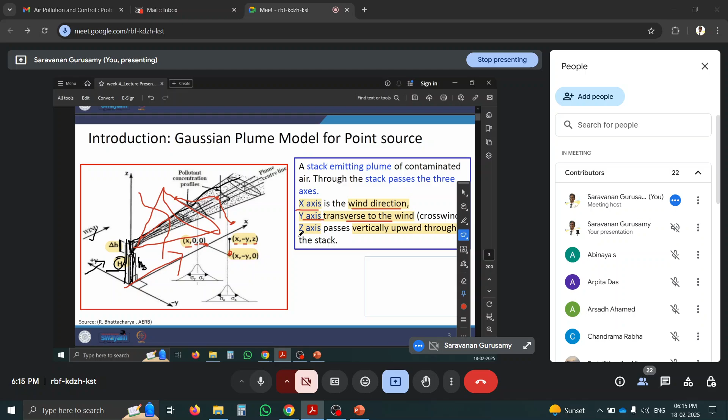Plume is the air parcel emitting from the industry. Based on different buoyancy conditions, it may rise more or less. Also, temperature and exit velocity determine this, as well as wind direction. These are the parameters affecting the concentration of air pollutant. First is the wind direction: the initial direction of transport of pollutant determines the wind direction, where it's turning, and it is inversely proportional to increase in the wind angle direction.

Next is wind speed. A higher wind speed gives more dispersion; if it is a slow wind, you will not get dispersion and the pollutant may get concentrated. Also, wind speed increases with height. If you have studied fluids, you know the wind speed at the bottom is lower, and if you measure going up with height, the velocity will be more, because air is also a fluid and flows in the same pattern. So wind speed generally increases with height, and buoyancy versus plume rise is affected by wind speed. If the wind is 6 meters per second, pollution dispersion is more; if it is only 2 meters per second, pollution dispersion is less.

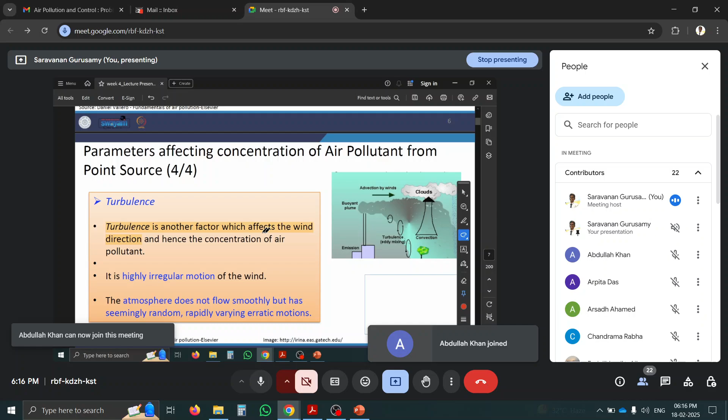Turbulence is caused due to obstacles like irregular motion, buildings, trees, or clouds. If they come in the wind direction, the wind will form eddies, which is a circular motion. That is the turbulence of the wind. Turbulence is another factor which affects wind direction, and it is highly irregular in motion.

For the Gaussian plume model, we need wind direction, wind speed, and the turbulence caused by the wind. These three factors need to be considered. Wind speed and wind direction you can measure, and based on the turbulence you can give the stability class like A, B, C, D, E, which we discussed last week.

To derive the Gaussian plume model, what assumptions can we take? The plume should spread due to molecular diffusion. That is the main transport mechanism by which the plume is spreading or dispersing.

The time required for the pollutant to travel to the receptor is neglected. That's why it's called steady state, because the concentration of the pollutant with respect to time will be zero. It is not changing with time. That is called a steady state concentration.

It will always follow a normal distribution. That is a very important point. In any direction you take, it will be a normal distribution, as you studied in mathematics. It is like a bell-shaped curve.

At the center it will be maximum, and at both sides it will be skewed down. For example, if at the center it is 10 milligram per meter cube, here it will be 5, here 2, here 1. So it reduces in both directions. That is called a normal distribution.

As I mentioned, this is the wind direction. This is the transverse direction of Z, and this is the transverse direction of Y. So it's following the normal distribution pattern.

You have to understand the symbols. Concentration is C, measured in gram per meter cube or microgram per meter cube — in one meter cube of air, how much pollutant is there. Anything — PM, ozone, volatile organic compound, NO2, CO2, SO2 — any concentration is C, mentioned in units of gram per meter cube.

Somebody is trying to share their screen mistakenly.

Emission rate is Q, in gram per second, from the chimney. For example, per second, 10 milligrams of CO2 is emitted, or 100 milligrams of CO2 is emitted — that is the emission rate.

Wind speed is U, and the standard deviation in the horizontal direction of the plume is sigma Y, because it's a normal distribution. So in the horizontal direction it will be sigma Y, and in the vertical direction it will be sigma Z. These are the two coefficients we have to mention, with units in meters.

The physical stack height is h, and the effective stack height is capital H, which is the addition of h plus the plume rise, delta H. That gives you the effective stack height.

Downwind direction is X, along the wind direction. Crosswind direction is Y, and the vertical direction is Z, which is the receptor height above the ground.

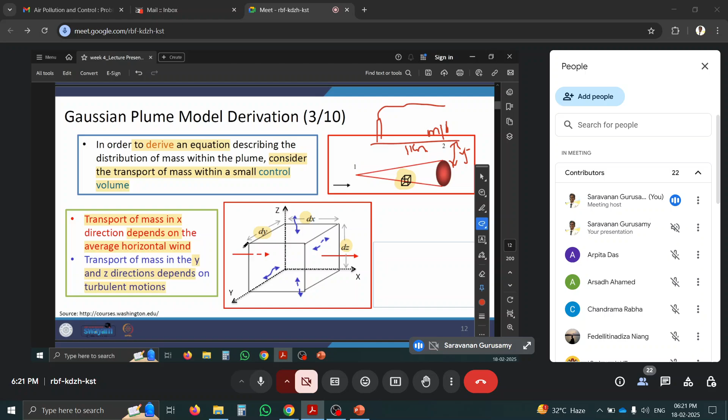Then the Gaussian plume model derivation will assume the transport of mass within a small control volume. So you assume here the pollutant is emitted and here the receptor is there, so it is spreading in a conical pattern. I am taking only a small

cube for modeling the concentration, and then I am integrating all the cubes to get the total concentration. You got it? So every derivation will formulate from a small cube or small piece of it, a control volume, we can say.

Then the transport of mass in the x direction will depend on the average horizontal wind, and the y and z direction depends on the turbulent motion. Because from here, how it will reach in the x direction is based on wind direction and wind speed, and it reaches in the z and y direction because of turbulence in motion.

That's why it's spreading in both y and z direction. It's moving in the x direction due to horizontal wind. Those are the two transport

factors. Then the change in the x direction you can calculate based on the mass balance. Whatever is emitted here will come out here also. So the net change in the mass flow will be mass in minus mass out, which will be your net change in the mass. That can be calculated based on C, U, A, Y, Z, because if you cross out all the

units, you will get microgram per second. That's your mass flow rate.

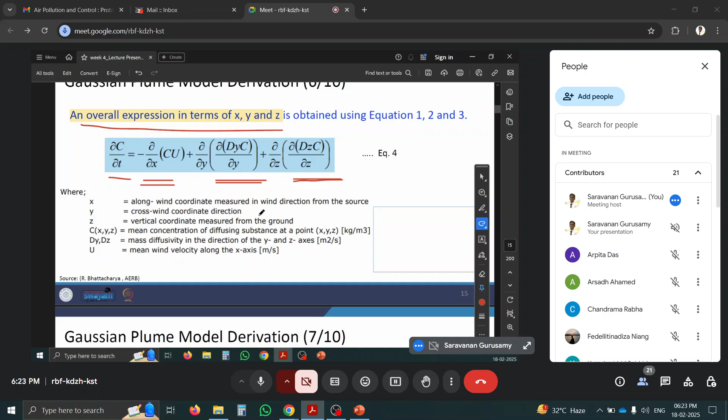A differential equation. So as we studied in mathematics, any differential equation can be derived by what we call an ordinary differential equation, which can be

converted into a general equation with the characteristic equation and a particular integral. Like that, if you assume the boundary condition of del C by del T equal to 0, because we know the assumption is steady state, concentration will not change with time. So del C by del T will be 0.

So if you fix this into the equation, you will get the final equation like this. And then you have to convert this into a general solution for the second order partial differential equation. You will get this equation. Then

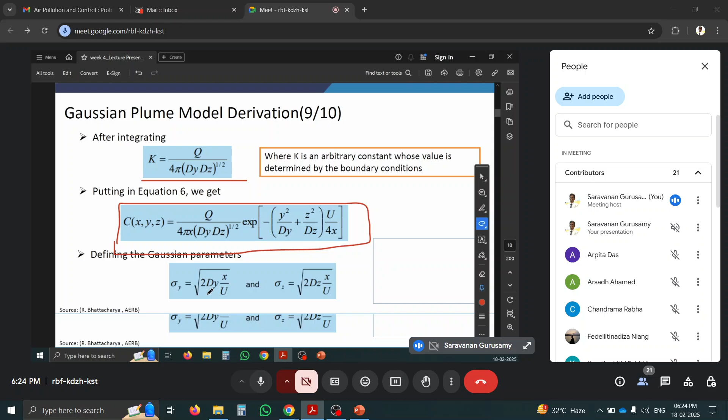you have to integrate to get the k value. That k value, if you substitute back, you will get this equation. This is your final equation, and you have to define the parameters sigma y, sigma z, because whatever the

Dy, Dz and all confusing, so whatever small parameters there are, I am merging them and finding sigma y and sigma z as a coefficient. So the final equation will be this, a general equation to calculate the steady state concentration of air contaminants. This is the final equation of the Gaussian plume model. Whenever you want concentration at any XYZ point, you have to take the emission rate, the flow rate, and

the wind speed, sigma y, sigma z based on x, and why is there no x in this equation? Because x can be used to calculate sigma y and sigma z from the tables and the graphs, okay?

And then you know the y, you know the h, effective stack height, and z, sigma y, sigma z, you can just substitute and get the concentration of pollutant at any point away from the source in the wind direction. So if you want the ground level concentration, substitute z equal to 0, but y is there. Then the equation will become like this, because 1 by 2 will be your 0.5.

Okay, and if you want to measure ground level and on the center line, then y also will become 0, as I mentioned. So the equation will be very much simplified. I will upload a PPT only with the equations.

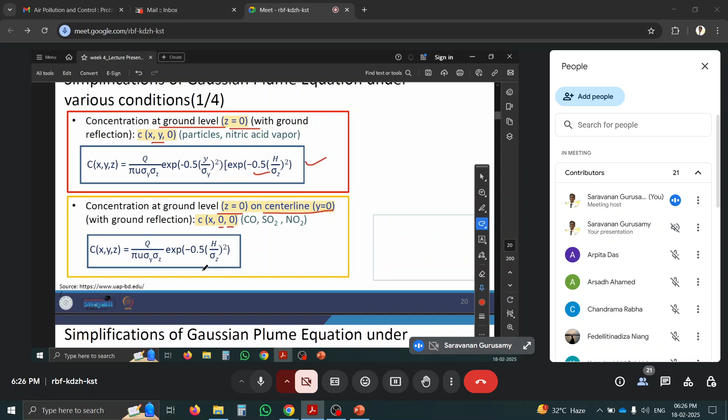So this is a simplified equation. If z equal to 0, y equal to 0, and you want to measure the concentration at the ground level, then with the ground reflection, H also will become 0. Then the equation will be very small. So this is your basic equation. You can substitute it - if y equal to 0, it will become another equation, and if z becomes 0, it will become another equation. So this is your basic equation. Please read this and remain with that.

Another question they will ask - because we know the concentration at any point, but they are asking where the concentration will be maximum. That question will come, right? So to find the maximum concentration, at what distance and what is the concentration. So we need to find the x at which the concentration will be maximum, and what is the maximum concentration. So these two questions will come.

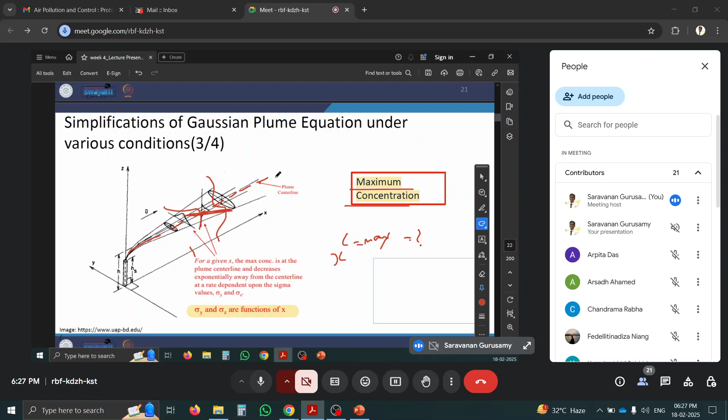For that, I am assuming another condition. The maximum ground level concentration will be at the center line. As I mentioned, it will be a bell shape, and in the y direction also it will be a bell shape. So always it will be at the middle, this dotted line. It will be the more concentrated pollutant. So y should be 0 always, z should be 0 to get the maximum concentration.

Then the equation will be like this, as we have already discussed earlier, and you have to get the stability class from the unknown table - whether it's daytime or nighttime, what is your wind speed, and based on that, your sun radiation, whether it's strong insolation or low cloud cover. So usually it will be D class, because based on the maximum condition, it will be in D class only, the stability class I am saying.

Okay, then the wind speed can be calculated. If the wind speed at 10 meter is given, or the ground level is given, then the wind speed at the chimney's height - chimney, as we mentioned, 250 meter, 300 meter also it may go. We have calculated last week, right? Based on the concentration of CO2 and the concentration of SO2, we have calculated the chimney height.

So if the wind velocity at 10 meter is given, you have to calculate the wind velocity at the chimney height. Wind velocity will increase with height. That's what we have seen in the first slide. So if it is 10 meter per second here, it will be around higher here - always it will be higher than the wind velocity at the bottom.

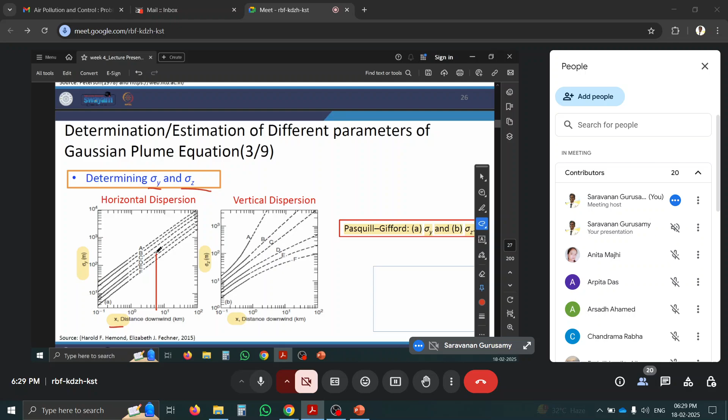Then how to find sigma y and sigma z? So we have the chart for both. We have the x - this is a log, semi-log graph. So if it is 1000 meter, then go with 1000, and you can match with your stability class, then get your sigma y or sigma z. Also, you can calculate sigma y and sigma z based on this type of empirical equation, but that empirical equation requires A, B, C, D type of coefficients - that also you can get from tables.

The theta and all we need from the table. Okay, we will solve some small problem.

The stack in an urban area is emitting 80 grams per second, so Q is 80, given. It has an effective stack height of 100, so directly the effective stack height is given. That is H plus del H, the capital H, given at 100 meters.

The wind speed is 4 meters per second at 10 meters. So they have given wind speed at 10 meters only, and we need to find the wind speed at 100 meters, that is the effective stack height.

They are asking us to find, it's a clear summer day. So what is the stability class for a clear summer day, with the sun nearly overhead, so there is no cloud? And estimate the ground level concentration.

So only x is given, y and z are 0. 2 kilometers downwind of the center line, that is 2000 meters. Center line is y equal to 0, z also 0 because it's ground level.

The second condition is 2 kilometers and 0.1 kilometer away from the center line, so that is 100 meters. So the second condition is this, and we have to find the concentration for it.

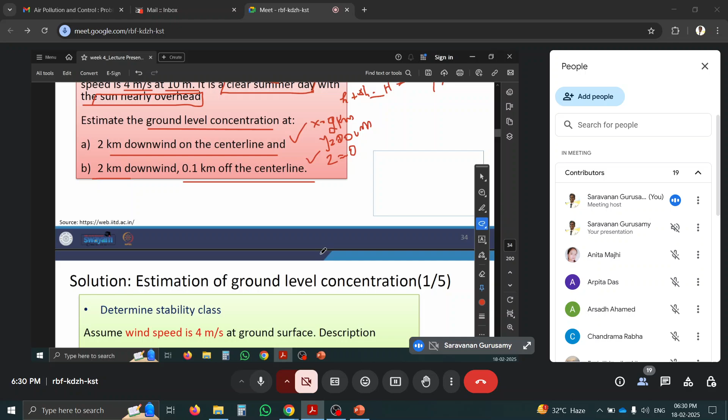As I mentioned, for the stability class, strong insolation because there is no cloud. So at daytime, wind speed is 4 meters per second at 10 meters, then you can identify the stability class as B.

So if you know the stability class and the distance x, then easily find sigma y and sigma z. Then you need to understand the wind speed at the effective stack height, that is 100 meters. So if I know at 10 meters it's 4 meters per second, what is it for 100 meters with p 0.15, because for stability class B urban region it is 0.15.

So if I substitute, I will get the wind speed at 100 meter stack height. Then I have to substitute into the bigger equation. Directly they have taken the x, y, z equal to 0 formula. So if you put it in the bigger formula, z will become 0 and you will get concentration as 64.3 micrograms per meter cube.

They have substituted sigma y, sigma z calculated from the graph, and effective height is 100 meters, y is 0 because y and z are 0, Q is 80 gram per second, pi is there, sigma y and sigma z are there. So this is the formula.

Okay, so same if you go with 100 meters or 0.1 kilometer away from the center line, then y will be there. Then the concentration becomes 60.6. You think here it's 64, here it's 60.

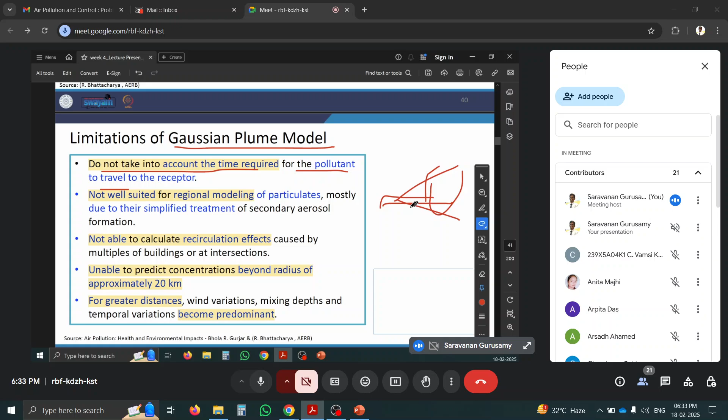But what are the limitations of this Gaussian plume model? It will not take into account the time required for the pollutant to travel, because I am assuming whatever is emitted will spread in this conical form, but I don't know if after 1 day or 2 days it will reach the 2 kilometer mark, or on the same day it will reach 2 kilometers. That is not considered in the model, and it is not well suited for regional modeling.

So it can be used only for point sources and is not able to calculate recirculation effects. We are assuming it's going in one direction, not recirculating because of buildings or intersections. It is also unable to predict concentration beyond a radius of 20 kilometers. So the maximum distance we can calculate is up to 20 kilometers only, for x, y, and z everything.

For greater distance, this will not work out. So that's our conclusion. The Gaussian plume model is very simple, and it incorporates wind direction, wind speed, and turbulence factors. It assumes steady state, and to determine parameters like sigma y and sigma z, we use Pasquill-Gifford stability classifications to get the stability class, which is widely used to estimate the local pollutant level.

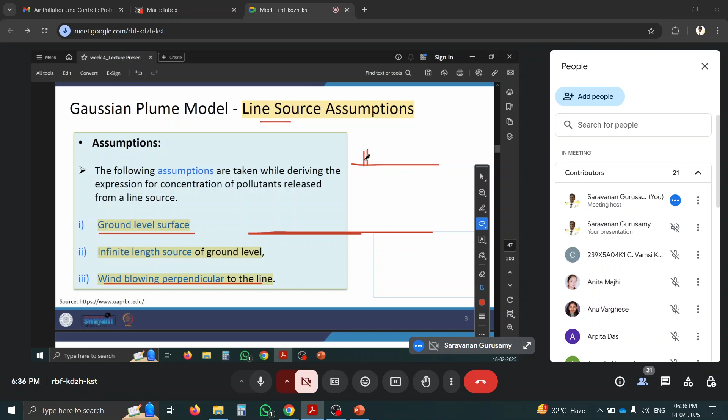So for the line source, we are assuming the ground level is flat, and we have an infinite length source. One different assumption here is the wind is blowing perpendicular to the line. But in the point source, the pollution goes in the wind direction. Here the car is moving in one direction, emitting pollution, but the wind is blowing in a different direction. You got it? That's what the model for the line source models.

So consider a road or a highway. X is the direction of the wind, and Y is your pollution emission direction.

If you want to derive this from the point source, I'm taking the same model for ground level concentration, because it's not emitted above 10 meters or 100 meters—it's emitted at ground level, since all the exhaust from a car or engine comes out at ground level. So we take C(x, 0, 0). That's the formula I'm using here, with z equal to 0, and y taking a value. So this expression for the point source will be modified into the expression for the line source.

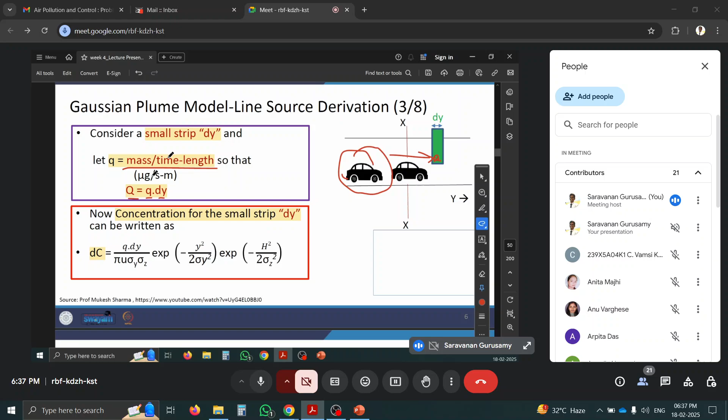As I mentioned, any model can be derived from a small strip or a small control volume. Here I'm taking a small strip because it's a line. So the mass per time per length of pollution is taken as Q equal to small q into dy, which is the pollutant emitted by one car or one particular point in this strip. That can be calculated from this equation, which is then applied to the concentration of the pollutant formula and integrated to get the final equation.

As I mentioned, the line extends to infinite distance, so it starts from minus infinity to plus infinity—there's no boundary. So it is integrated from minus infinity to plus infinity to get the final equation. The simplified equation is this one, for the line source model, and you have to substitute s equal to 1 by root 2 times y by sigma y.

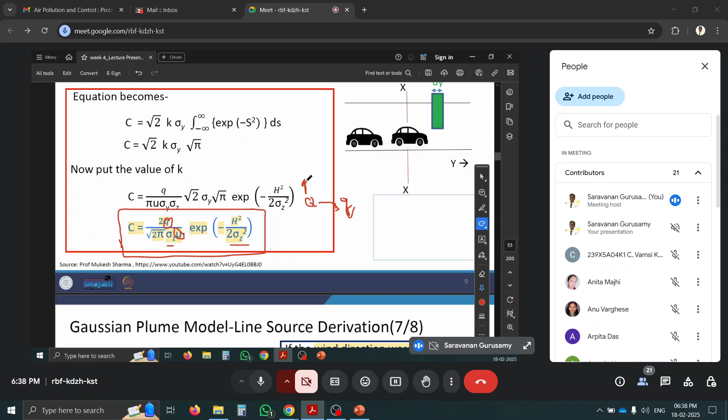So you will get s as a parameter here, and the final equation will not have other parameters. So it becomes C equal to 2Q by root of 2 pi sigma z into U, where U is your wind velocity, and only sigma z will be there, no sigma y, because there's no movement from the center line. And q, the small q, is your emission per length of pollutant—that's why we change capital Q into small q. So small q will be in micrograms per second per meter, or per vehicle.

So this is your final small q per meter formula. If you assume the wind is flowing at an angle, you have to substitute sine phi, where phi is the angle of wind direction. If phi is 0, the concentration will become infinity, so you always have to assume phi is greater than 20 degrees. Otherwise, if phi becomes 0, the concentration will become infinity.

So this line model will be used to find the ground level concentration of any car or scooter emitting ground level pollutant, that is h equal to 0. Then your equation will become this.

So line source examples are motor vehicles, agricultural burning, everything happening at ground level but as a line source. A line of industries on the bank of a river, each emitting in the same direction, is also a line source.

So for your understanding, here is a small problem. Estimate the total hydrocarbon concentration, that is your pollutant, at a point 300 meter downwind, that is your x, on an express highway at 5:30 p.m., that is evening, and an overcast day. On an overcast day, the stability class will be D.

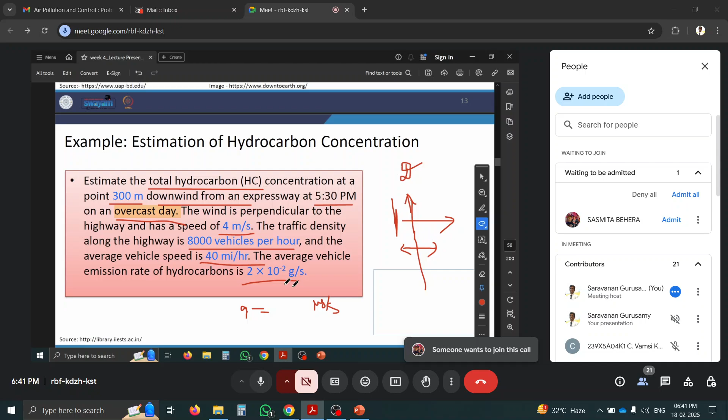I want Q in microgram per second, but this is capital Q. I need Q in terms of per meter, so microgram per second per meter. For that, I have to divide it by meter. Meter will be here, miles is here, so vehicle per hour into mile per hour, hour will cancel giving vehicle per mile. Then you multiply here and you will get per mile. That's the concept here.

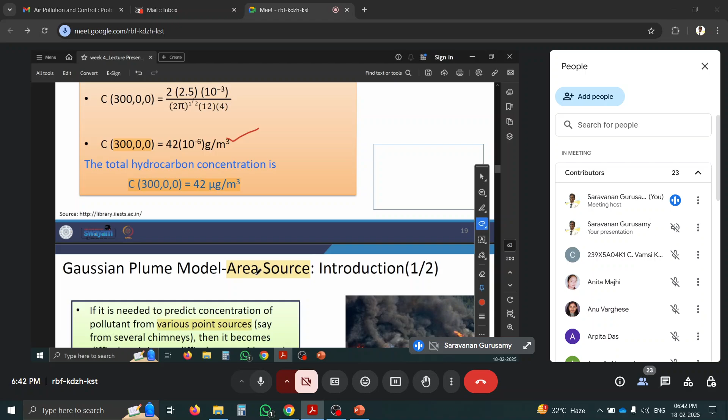Then I have to get the stability class. Stability class is overcast day, that is D stability class. So downwind direction x equal to 300. At x equal to 300 with D stability, what is sigma y, what is sigma z? For a line source, there is no sigma y, only sigma z is required. Substituting this into the equation, you will get a value of 42 microgram per meter cube. That is your final concentration of hydrocarbon emitted on the express highway after 300 meters.

Then the area source. Area source is like burning the whole landfill or a group of industries, or again agricultural burning. All of these come under area source.

So this concept of area source becomes important to facilitate the modeling and predict the concentration, the same way we do for all the models. I assume here there is an area, this is the area source, but I am converting this area source into a point source and using the first formula again, that is the point source formula. So how to convert the area into a point? I have to project backwards, then I will get the point here.

So if I am emitting from a point source, then I can easily get a value at a distance here. So if I am emitting from an area source, I am converting it into a point source. Then after the area source, what is the distance here? I get the total distance and calculate the concentration at this point. So this is one method to convert area source into point source, using the total distance I am getting.

At 300 meters away from downwind direction, this is x as I know it. But I have to get the imaginary x, that is x naught. I have to add this imaginary x and my original x to get the total x. Then I have to do the point source calculation, the same concentration C formula.

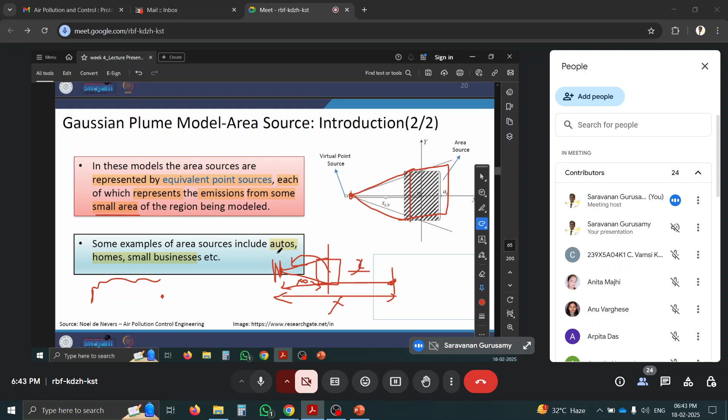Understand the assumptions represented by equivalent point source, each of which represents the emission from a small area. Then it will be calculated as a point source model simply. So the distance of the virtual point - the area is converted into a point here.

That is the virtual point x naught. Then the distance between the location where we are measuring the concentration of the area source and the receptor is xr. Then the total will be your x. You have to use the model for this x only. The final model will be for this x.

And the emission from this point area source is q, and this side is s. Area side is s, I am assuming this is a square, so this will be s. So s is used to calculate the x naught, the virtual point I can calculate.

Then initial spread of virtual point is sigma y naught. See, this is the point, this is the area source. I am actually requiring the concentration at this point at a distance xr, but I am converting this into a virtual point at the distance of x naught. That's the virtual x direction distance. This is the y naught, virtual y naught, sigma y naught.

Now you see the virtual point is taken somewhere back with respect to the original point, and the shifted distance is x naught. Actually, the point is here, area is - I am shifting this point to here because it's the area. That distance is x naught.

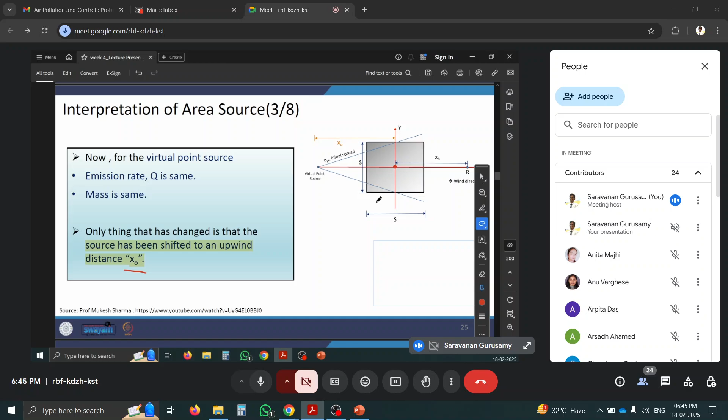How to find sigma y naught? From s by 4.3, that is the exact equation. Sigma y can be calculated from s by 4.3. What is s? S is the side of the area that is emitting the pollutant. If I know sigma y naught, I can calculate x naught, right?

How can I calculate x naught? The same graph I am going back. So I know the stability class, I know sigma y now. So if I go back, I can get the x naught. You got it? It's a back calculation, so I am going backward. I am getting the x naught value.

I know the sigma y naught from the s value. I know the stability class. So if I back calculate, I can get the x naught value. It's simple.

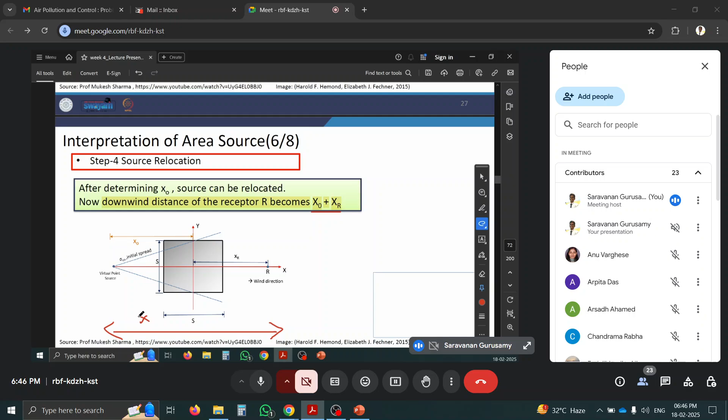Then I have to add this x naught and the xr, the total x I can calculate. So for this x I have to calculate again sigma y, sigma z, that is the final sigma y and sigma z. I have to substitute in my first equation, that is the point source equation, that will become your area value. You got it?

So the summation is your x naught plus xr. Calculate the sigma y and sigma z for the calculated x. Then just convert into normal point source, GPM equation for the point load we have to use. So the only assumption is we are getting a virtual point.

That's it. So let's see the example: upwind of a Taj Mahal. Taj Mahal is here, please don't mind my drawing. So there is a Taj Mahal here, there is an industry 30 meters away, an industry of 30-meter height.

So no need to convert 10 meter to 30 meter; directly they have given wind speed at 30 meter. And the side of the area source S is given as 500 meter. So if S is known, x naught can be calculated from sigma y naught and the stability class. What is the stability class? You can calculate based on stability class.

We can calculate the x naught, and they are asking the distance between these two. If we know this, we can calculate the pollutant reaching the Taj Mahal. So treat the area source as an effective point source.

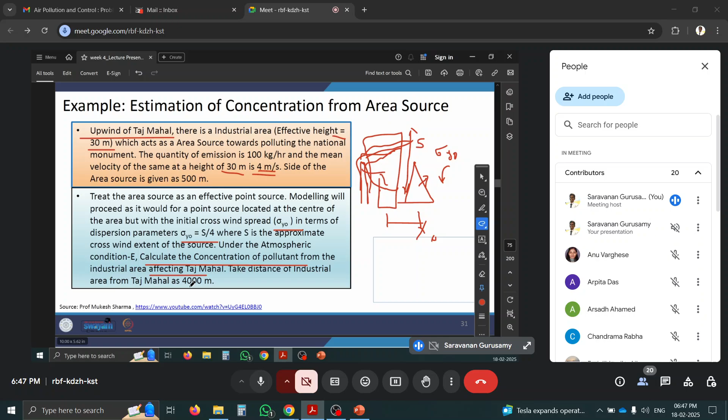Modeling will proceed as if from a point source located at the center. So you have to calculate sigma y naught from S by 4, and calculate the concentration of pollutant from the industry affecting the Taj Mahal. Taking the distance of the industry from the Taj Mahal as 4,000 meters, so XR is 4 kilometers.

So what is X naught? I can calculate it. See, they have drawn this diagram. 4,000 I know, S is 500 I know. This is the wind direction, this is the whole industry, and this is Taj Mahal, T. So I have to calculate S by 4, and I can get the sigma y naught.

The stability class given, the atmospheric condition, is E. So I know sigma y naught and the stability class E, so I can get the x naught value. If I know x naught, just see the figure: X naught plus XR will give you the total. Receptor means R, Taj Mahal means T, so they have simply converted to get the total X.

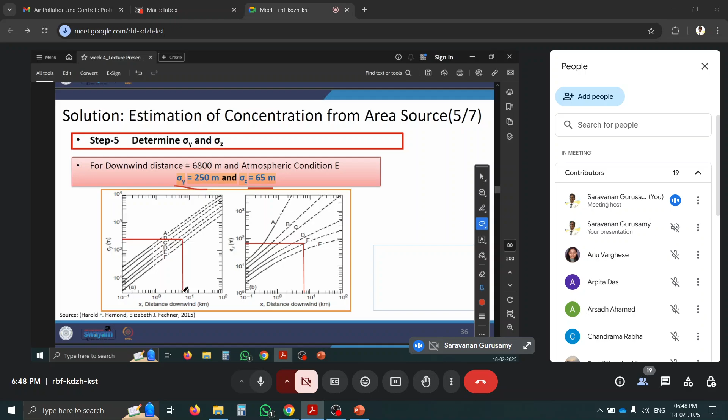So if I know the total X, again I take sigma Y and sigma Z for the calculated X. What is X? 6,800, so 6.8. What is sigma Y? What is sigma Z? Then I calculate the concentration at the downwind direction reaching the Taj Mahal. I know the height of the Taj Mahal and the centerline only, so Y equals 0. Just put it in this equation and you get the concentration as 122 microgram per meter cube.

I hope you can simply calculate this. If you have any doubt, please reach me out.

The initial spread for the intersection of the area source is given as... yeah, that's what we have discussed now, ma'am. Sigma y naught S by, just put the answer.

But please don't discuss the week four assignments here, that I should not discuss here. So the answer, we have actually discussed here: sigma y naught can be calculated by S by 4.2, or S by 4. You got it? Okay, fine.

So what are the disadvantages of this area source model? It requires a large amount of input information because I need the S value, and all the values, so it consumes a large amount of computer time and involves complexity. That's the problem, so I can go with alternative methods like narrow plume hypothesis models or area emission rate models.

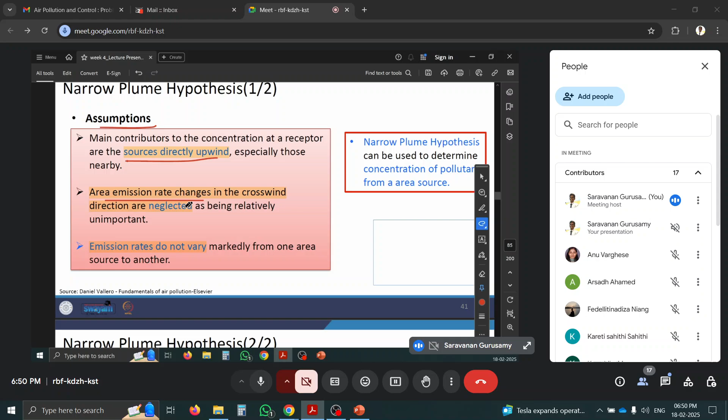The assumptions for the hypothesis are: source directly upwind, and the area emission rates can be neglected in the crosswind direction, and emission rate does not vary. These are all the assumptions, giving the narrow plume hypothesis model, where a series of infinite crosswind lines are calculated. There's the ATDL model, that is the Atmospheric Turbulence and Diffusion Laboratory model, and the RAM model, Regional Air Monitoring model.

C equals K Q A by U. K can be 50, 200 or 600 based on the pollutant like SO2, PM, or CO. QA is the area emission rate, and U is the wind speed. If you know these three values, simply put them in and get the result.

For the area model, you can get the concentration. So the conclusion is: for a point source we get it from the equation, and for an area source you can convert into a virtual point and use the same point source model. But there is a problem with the data - if you don't have more data, you just go with the hypothesis model proposed by the narrow plume hypothesis.

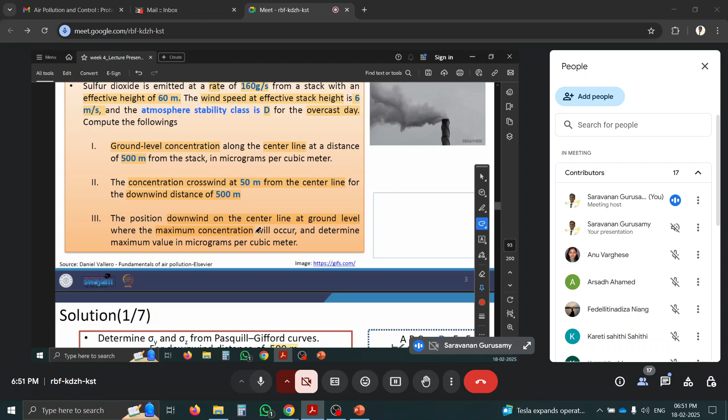Okay, so we will solve some more practice problems for point source, line source, and area source. So read this question, I'm going with the question again. This is again a problem solved.

Sulfur dioxide is the pollutant here. Q is the rate of emission, 160 gram per second, that is emission from a stack height of 60 meters. They directly give the capital H; otherwise you have to calculate the stack height plus plume rise and add both to get the effective height. Wind speed at the effective height is directly given as 6 meter per second, so no need to calculate U at 60 meters again. Atmospheric stability class is capital D - on an overcast day, overcast day means stability class D only.

So they are asking us to calculate the ground level concentration. Ground level concentration is equal to 0 at the center line, so Y equal to 0 at a distance of 500 meters. So X equal to 500 meter. You got it, the first problem. The result unit they require is microgram per meter cube.

The second question asks concentration crosswind at 50 meter from the center line. So Y equal to 50 meter and the downwind distance is 500 meter. The third question asks the position downwind on the center line at ground level where the maximum concentration will occur. So they are asking what is X to get the maximum concentration, and to determine the maximum value. What is the maximum concentration?

C max - both they are asking us to find. So how to find? First I have all the data. For keeping in the bigger equation, I need sigma y, sigma z. To calculate sigma y and sigma z, I know x equal to 500 and stability class D. I can find the sigma y and sigma z.

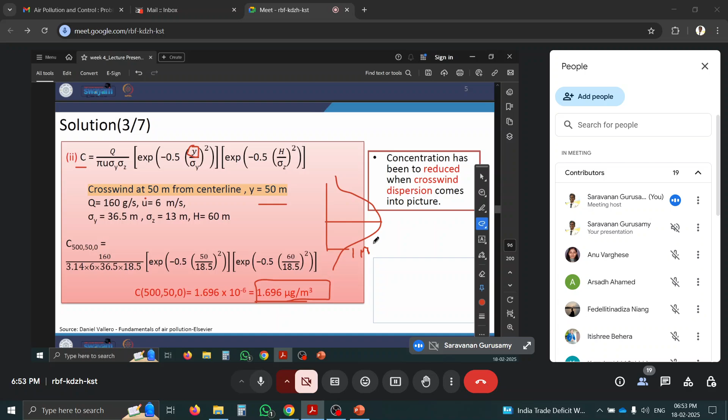Then the second question, y also they given us 50 meter. So substitute y as 50 meter in the same equation, you will get 1.696. See the difference - the concentration is 65 microgram per meter cube, but if you move just 50 meter away from the center line, your concentration is reduced to 1 microgram per meter cube. Think about the normal distribution - it's 60, after 50 meter it is 1 microgram per meter cube. That's what the dispersion happened. It's dispersed a lot, reduced when crosswind dispersion comes into picture.

Third question, they are asking the maximum concentration. The maximum concentration will occur at h by root 2 always. So we know the h value is 60, so we can find the sigma z. From the sigma z, back calculate the x value. I know sigma z, I know it's stability class D, so directly calculate the x value.

That is 1300. So for that 1300, I have to calculate sigma y and sigma z, then substitute in the bigger equation. They are asking at the center line - we know center line only will get the maximum value. So 1300 comma 0 comma 0, 1300 is the first answer - that is the distance at the maximum concentration we can get. And what is the maximum concentration? 873 microgram per meter cube at a distance of 1.3 kilometer.

You got it? Then there is a problem for the point source. We are given sulfur dioxide, same pollutant, at the rate of 160 gram per second into the atmosphere, where the wind speed is expected to be 6 meter per second, same wind speed from the effective stack height, and at the ground level of 10 meter at night time. So they are saying at night time, at the ground level 10 meter height, the wind speed is 5.1 meter per second.

So what is the wind speed at effective stack height? That is 6 meter per second. So you see the difference, 5.1 meter per second and 6 meter per second. And then it is desired that the ground level concentration at the center line is 200 microgram per meter cube. They give at a distance of 800 meters - X also they given. What is the effective stack height?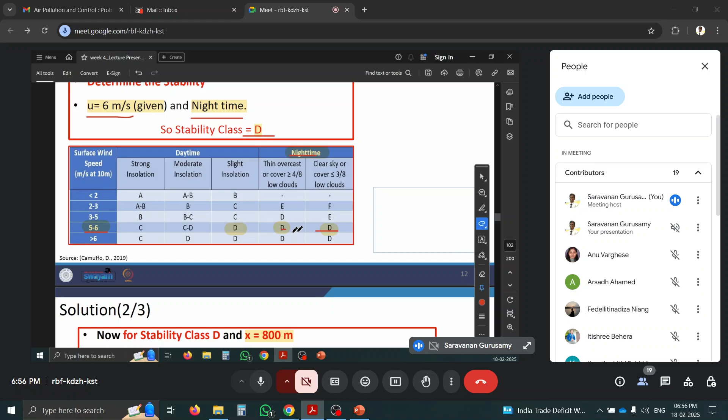H they are asking, so just calculate - use the same formula to calculate H. They said night time, U equal to 6 meter per second, so the stability class will be D. It's calm, wind speed 6 - just see here, night time, so always it will be D-D. From the table they give, you can calculate. Then sigma you can calculate for x equal to 800. Put it in this equation - only H is unknown. You can find H equal to 76 meter.

Again, there is a problem for the point source only. A chimney of height 250 meter, emitting at the rate of 500 gram per second, and it is a sunny day with a moderate wind speed. So you can calculate the stability class. The stack diameter is 5 meter, exit velocity is 13.5 meter, gas temperature is given, wind speed is given, plume rise temperature is given - that is the temperature at the exit. This is the ambient air temperature.

Then the ground level concentration they are asking at the center line at a distance of 1 kilometer. So x equal to 1 kilometer, y equal to 0, and z equal to 0 because ground level. What is the concentration they are asking? Stability class A they given, and the density they are given. So what is the requirement now? We know the x, so we can calculate sigma y and sigma z.

Okay, we don't know the h value. Effective stack height wasn't given, only the stack diameter, because h is missing in that formula. H is required, so for finding that we are going to use the Gaussian dispersion model to find H.

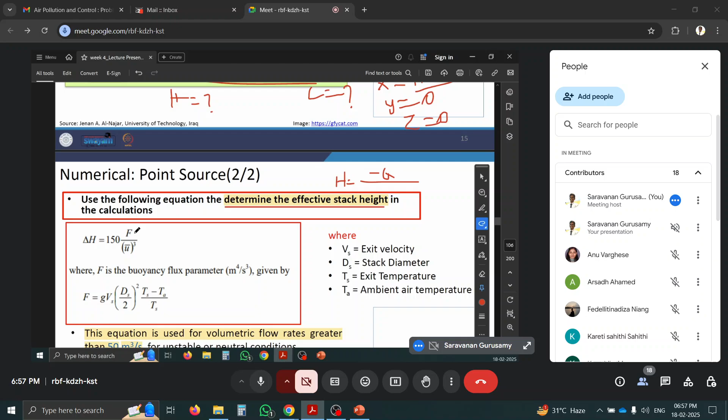You know that value, right? Minus Q by sigma, that also we have. But if you don't have those values, only with the temperatures given, we can use this formula to find the H value.

How to find the H value? 150 F by U bar cube. U bar is the wind velocity at stack height. So F is unknown. Now F can be found. F is the buoyancy flux parameter.

You know the G value, 9.8. You know the exit velocity. You know the diameter of the stack, and then the plume temperature and the ambient air temperature. Substitute these, and you will get F.

So if this type of problem comes, they will give you the formula, no issue. Just understand, if there is no other data other than temperature, you can use this formula to find the effective stack height.

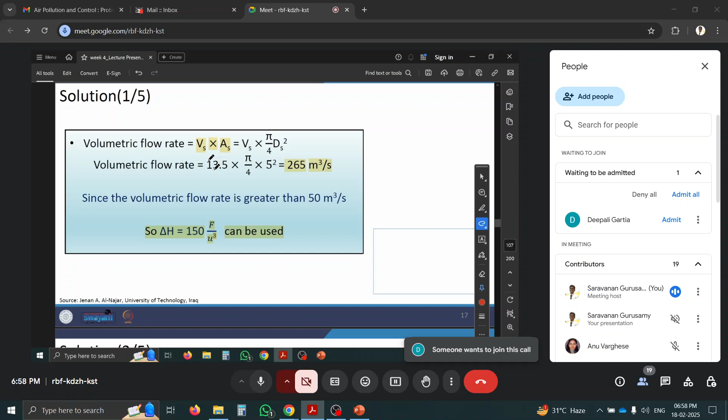Because for the concentration formula, we need Del H, right? See here, the final formula needs capital H. For the capital H, the whole effective stack height can be calculated from here. So if you substitute all the values here, you will get the Del H.

Okay, Vs is pending now again. So volumetric flow rate can be calculated by Vs into As. Volumetric flow rate is Vs into area, we know pi by 4 ds square. Vs is 13.5. So this formula can be applied only when the volumetric flow rate is 50 meter cube per second above. So it is 265.

So it is greater than 50 meter cube per second. Just remember this: this formula can be used only when the volumetric flow rate is greater than 50 meter cube per second. So we know Vs is 13.5, but we have to check whether the volumetric flow rate is above 50 meter cube per second or not.

Then you just calculate this formula. Del H is 158. Then the effective stack height can be calculated by 158 plus 250. What is 250? The physical stack height.

Where is it given? The chimney has a design stack of 250 meters. Okay, that is the stack height. The plume rise, that is the Del H they have calculated. Now they have to add both the physical stack height and the plume rise to get the total H, capital H.

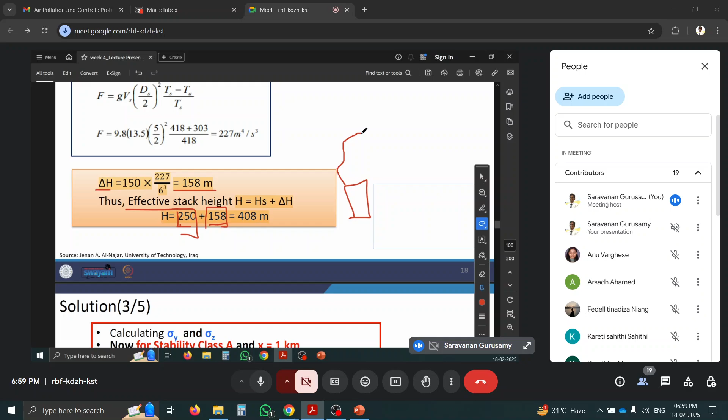So for a 250 meter stack, the plume is rising up 158 meters. Think about there being a chimney and the plume rising 158 meters before it disperses. Think about how much height it rises before getting dispersed. Okay, then the capital H we have calculated now.

We know 1 kilometer, so just calculate sigma z, then put it in this formula. Because as I said, x is given, y and z are 0, and H we know. Okay, just substitute here. We will get the concentration as 262 microgram per meter cube.

Okay, the same problem we will solve for line source now. For point source we got four problems: one is normal C calculation, one is with all the other parameters as 0, one to calculate H from the concentration, and one to calculate H through some other volumetric flow rate equation. These are the four problems we had seen in point source.

Now we are going to use the line source formula to calculate the concentration of pollutant. So you can see here the question is given as Delhi Jaipur highway. Here the emission rate is 0.04 gram per second, that is your Q value, they have given it. So determine the total chemical concentration of the pollutant at a point 500 meters downwind.

So if you assume a chimney here, there is a distance 500 meters away from that. What is the concentration of the pollutant from the highway on an overcast day? So the stability class is D. Please remember, overcast day, stability class is D.

Otherwise, they will give you the stability class. Otherwise, for sunny day or night time, that and all they will give along with the U value. You can get the stability class from the table.

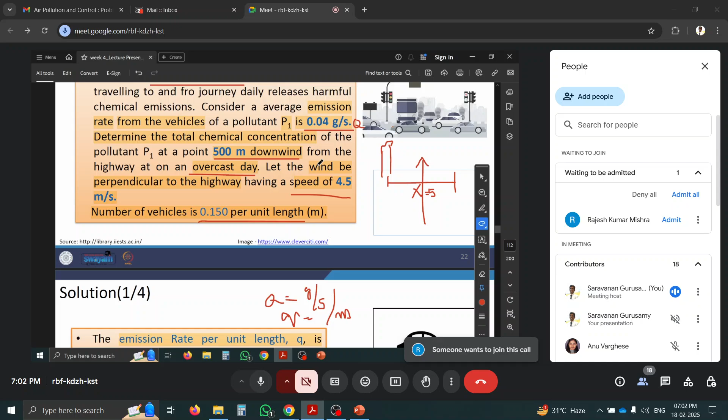Okay, so they given gram per second, then you have to divide it per meter. You will get the source emission source.

Then get your 500 meter sigma y and sigma z. Sorry, sigma y will not be there in the line source. Only sigma z is enough for the stability class D because it's an overcast day.

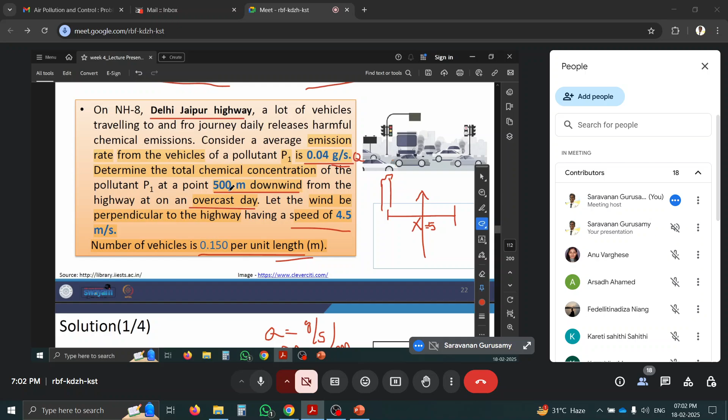Then just substitute in this equation, you know the line source equation. So the ground level concentration, ground level source H equal to 0 because the vehicles are emitting at the ground level, right? So see the emission from the vehicle, it is ground level. So H is 0. If it is a chimney or the stack, there is an effective stack height, capital H. If it is a vehicle, then it will emit at the ground level, so H is 0, you got it.

So just use this small formula. You will get 500, 0, 0. What is the value? C equal to 53.2 microgram per meter cube is your answer.

It's a line source, so line source can be also applied to the industries. Having a line of industries on the bank of a river, then it can also be considered as a point or line source. There H will come into the picture. But if it is a traffic emission, then H will be assumed as 0. Hope you understand that, okay.

Then now you please go with the area source formula.

Okay, sorry for that. So now we are going to solve some own problem in area source. So area source, how do you have to convert? There is an S given, that is the sides of the area, and we have to consider a virtual point at the back side, that is your assumed x naught. Then we already know what is the point they are asking, that is 1xr. Then we have to sum total, so again you have to use the same point source formula.

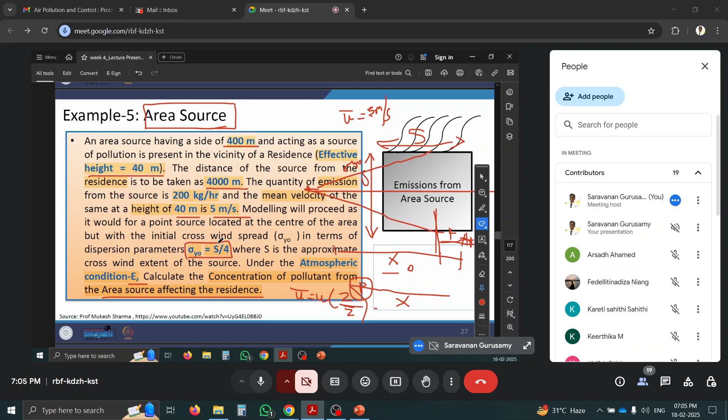Okay, first itself they've given the side, side as 400 meters, so they've given it easily. S is 400. From the area source to the receptor, it is 4000.

So we are assuming a backward point source here. Okay, this is a virtual point, so that is the distance of x naught. So x naught, this is sigma y naught. Sigma y naught can be calculated by s by 4. So s is 400, then sigma y naught will be 100.

So for 100, what is the x? Sigma y naught is 100. For 100, at a stability class of E, what is your x naught? So x naught you can calculate and put it in that figure. So this is what is the x naught? 2400. So we have calculated as 2400 meter.

So from the 2400 meter plus 4000, 6400 meter. So total is 6400 meter is the final x. That is the final x value. Add x naught and the xt or xr, the receptor's value. So if you add both, you will get the total x.

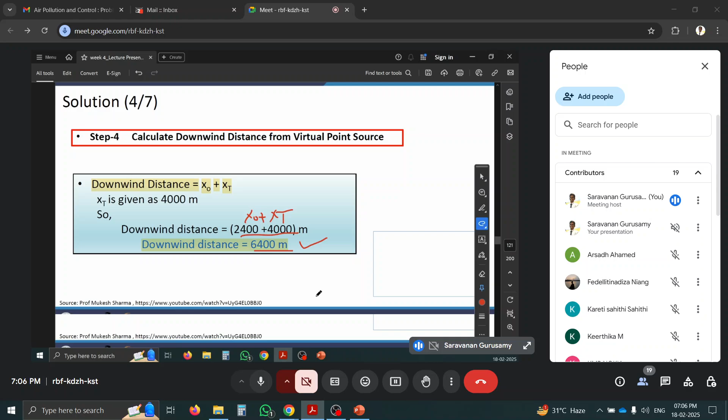Now for the total x, calculate the sigma y and sigma z, put it in the point source formula. That is the first formula, the biggest formula. And they are asking the ground level, so ground level y equal to 0, sorry, center line y equal to 0, ground level z equal to 0.

Stack height 40 meter they've given. Just substitute in the smaller formula. You will get the concentration value as 246 microgram per meter cube. This is the area source formula.

So what we understood now, Gaussian plume model is a simple model that can be used to find point, line and area source concentrations. If it is emitted from the area source, we can calculate the concentration at any point, C x, y, z, we can find any concentration. Several assumptions were considered like steady state, it's an infinite source, wind speed is constant, and the ground is plane.

This type of assumptions we got, but there are some limitations. It cannot be applied above 20 kilometer radius. Turbulence is taken into account, but time is not taken into account, and the reactions are not taken into account. So these are all the limitations, but it is giving a good value. Even though it's having limitations, it's giving approximately good results. So a variety of factors like wind speed, effective stack height, and stability class are taken into account.

So finally, some two small concepts we are going to see here. One is assimilative capacity. If people are from basic environmental engineering or civil engineering, you may know the basics. In water pollution, we have a concept of self-purification. If you emit any industrial effluent into the river, the river has its own capacity to treat the pollutant through turbulence, dispersion, or mixing with a bigger quantity, reducing the concentration.

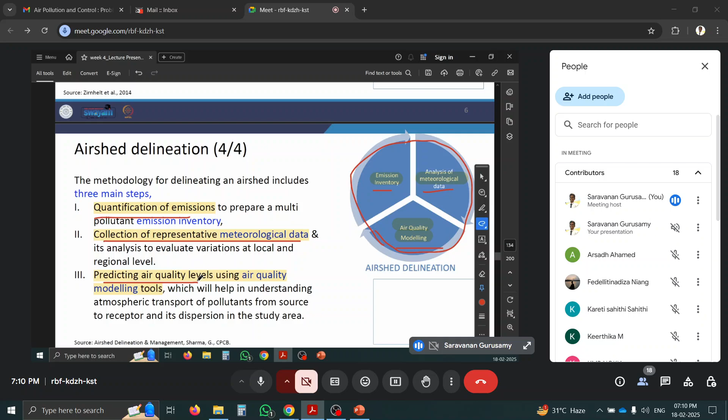If these three can be combined: airshed delineation, quantification of emission, collection of representative meteorological data, and predicting the air quality - these three are the main methodology for airshed delineation.

Now here comes the concept of assimilative capacity. Whatever pollutant is getting into the airshed, the airshed has its own capacity to purify the air, whenever it is discharged into it, without violating the best designated use of this air resource. So we can still use the air after emitting this much pollutant. Like even some rivers have some pollution, we can still drink the water.

So that much quantity it has its own purifying capacity. The phenomena governing the assimilative capacity of the air environment include dilution, dispersion, and deposition. In water, there is turbulence and deoxygenation, reoxygenation will happen. The same in air - dilution, dispersion, and deposition is happening. Because of that, the pollution is getting reduced, the concentration is getting reduced.

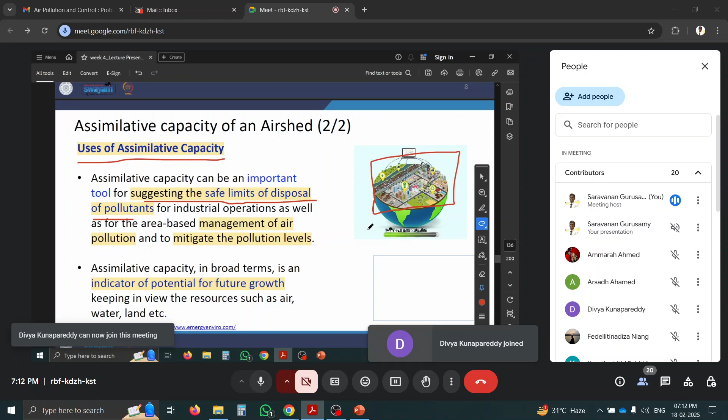So what is the use of assimilative capacity? Why do we have to find this? If you find this, then you can understand whether the air is good to breathe or not - safe limits of disposal of pollutant, whether I can add some industry or not. If I know the concentration in the airshed, then I know this is already exceeding the airshed's assimilative capacity, I should not construct any industry in this airshed. Then if there is any industry in this airshed, if it is having less assimilative capacity, then the pollutant will add up, and that air cannot be used for breathing. So that is the indicator for the potential for future growth, whether any industry can come or not.

So we can have an estimate by two approaches. One is with ventilation coefficient. The second one is with the pollution potential or dispersion potential. So only two assumptions here. Assimilation capacity is directly proportional to the ventilation coefficient, and indirectly proportional to the dispersion potential and the pollution potential. That is the two concepts here.

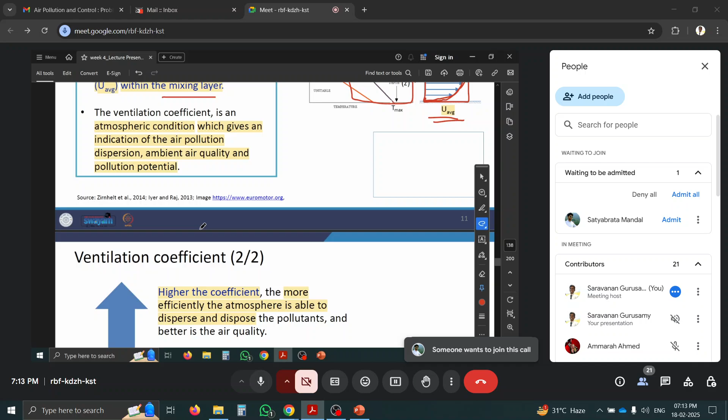So I have to draw a diagram with u as the x-axis, which is the wind speed, and height in the y-axis. Then if I multiply u and h within the mixing height, I will get the ventilation coefficient - the product of mixing height and the average transport wind velocity within the mixing layer. Then the ventilation coefficient in an atmospheric condition gives an indicator of air pollution dispersion, ambient air quality, everything we can get. So higher the coefficient, the atmosphere can more easily disperse and dispose.

If the coefficient is lower, then the wind speed is lower - it's directly proportional to wind speed, right? So if the ventilation is lower, there is poor dispersion, so there is no ventilation. That's the concept - stagnation of pollutant is happening.

So how to find the mixing height now? Because we have to multiply u and z within the mixing height, right? So how to find the mixing height? Mixing height is based on the height of the layer in which the pollutants are vertically dispersed. Above that, there is no dispersion, right? So it determines the volume of atmosphere available for the dispersion of pollutant.

So you see here, this is the mixing height. Above that, there is no dispersion. The pollutant is trapped within this layer, within this height. So how to find the mixing height? By radiosonde, remote sounding methods, or parameterization models - these we can use to find the mixing height.

There is a problem to find the ventilation coefficient. So how to find the ventilation coefficient? You have to multiply z and u within the mixing height. So first find the mixing height.

The ground level air temperature is 15 degrees Celsius and the normal maximum surface temperature is 26 degrees Celsius. You see at the ground level, the air temperature is 15 degrees Celsius, and the surface temperature can go maximum up to 26 degrees Celsius. They are asking, at an elevation of 100 meters and 300 meters, the temperature is 17 and 21. So just draw a line.

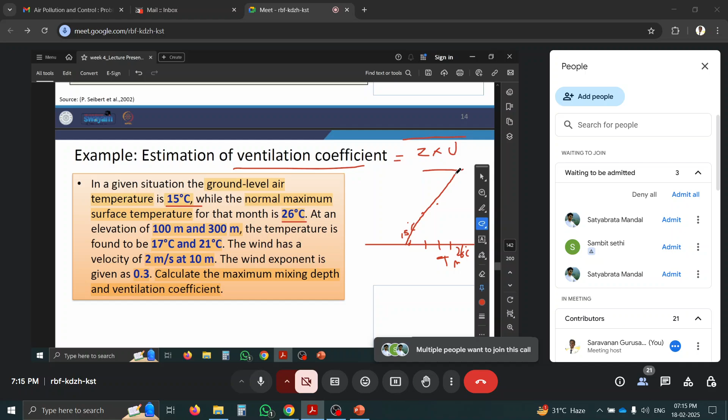So at 100 meter, the temperature is 17. At 200 meter, at 300 meter, the temperature is 21. So draw a line, this is linear or any pattern it will follow. See 15, 17, 21, it's following a pattern.

Then the wind has a velocity of 2 meter per second at 10 meter above. So wind direction is this, wind speed is 2 meter per second at 10 meters. So it will vary, again the wind profile will be a parabolic profile, right? So wind at 10 meter it is 2 meter per second. What is at 100 meter and what is at 300 meter height?

That and all we don't know. So the wind exponent is 0.3. That also they have given, exponentially it's varying. The exponent is 0.3. It's a parabolic or exponential variation.

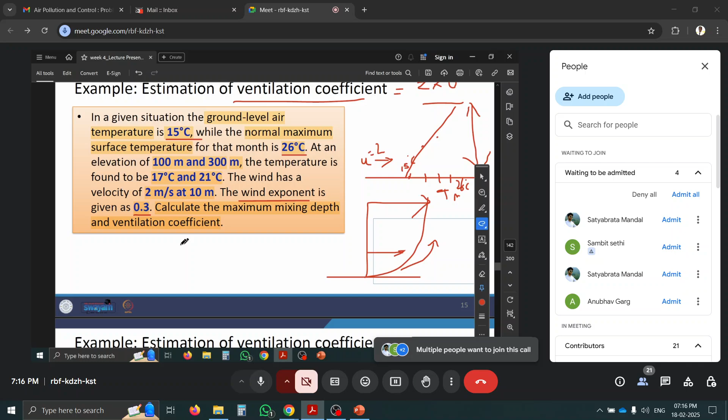Calculate the maximum mixing depth. Mixing depth is the mixing height. And then the ventilation coefficient. Ventilation coefficient is U into Z. So this sum we can do in Excel only, so they have already done and given this.

So 17, 21 and all at 100 meter and 300 meter height, what is the temperature? And we know the maximum temperature of the surface can go up to 26 degrees Celsius. Draw a line, an inclined line, that should meet the actual ELR. ELR is environmental lapse rate. So that meeting point is your maximum mixing depth.

So how to draw this line and at what inclination this angle should be there? That is based on your lapse rate. So see here, it's 21, it's 17 degree by 300, 100, these are all the depth. So you know difference in temperature by difference in altitude, it will be your lapse rate, right? Del T by del Z is your lapse rate, that is theta. So that will give you 0.02 degree Celsius per meter.

But this can be drawn with the DALR. We know dry adiabatic lapse rate is minus 10 degree per 1000 meter or 1 kilometer, or 0.01 degree Celsius per meter. So that you can draw a line wherever it's meeting the intersection, that is called the maximum mixing depth. The air parcel will rise until that intersection. Above that, it will not intersect because it's going as an inversion, right?

So up to that, it is an unstable condition, so it will mix. Above that, there is an inversion. So just find this point. How to find this length? So we know these two slopes.

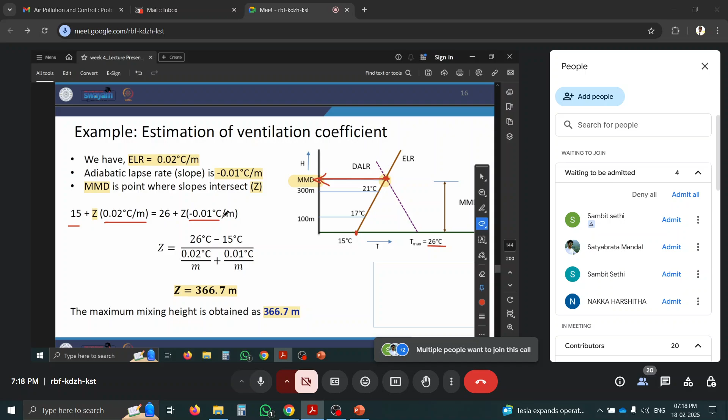If it is reducing at 0.02 degree Celsius per meter, and 26 if it is reducing at minus 0.01 degree Celsius per meter, then at what point will it mix? That Z you can calculate. Got it? So Z is 366 meter, it will merge. So at 366 meter, that is the mixing height.

How to find the ventilation coefficient? It is a multiplication of wind speed and the height. So you can calculate the wind speed at different points. They've given the wind speed at one point, so you just calculate the wind speed at different heights.

So up to 366 you can find, you can draw a graph, just multiply this area, you will get the ventilation coefficient. MMD into average wind speed.

Or else you can get an average. So this is the average, this is the wind height, so this is the area you can simply take. So instead of taking a parabola, they are taking an average value. So that average value into this, taking as a rectangle, and they are multiplying. So MMD into average wind speed will give you the ventilation coefficient.

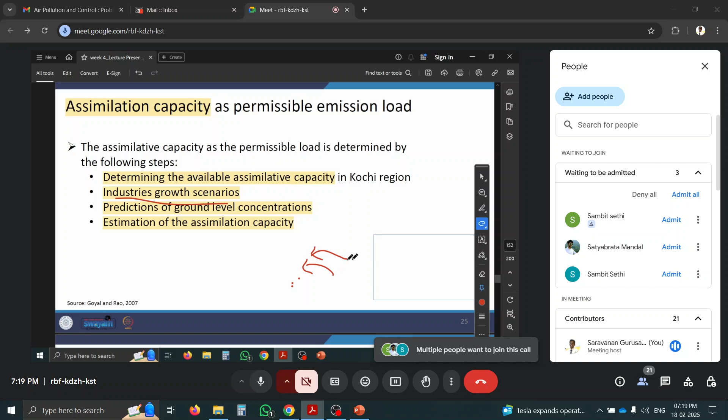So there are lots of case studies like Cochin, and they're all doing this assimilative capacity study, and they have suggested whether any industry can come or not to their area. That's what they have identified by calculating the assimilative capacity. So the industrial growth scenarios and different scenarios they have assessed without any industry. If new industries are coming, what is the impact to the air quality, that and all we can identify. So that is called the available assimilation capacity.

There is a standard given by the national air quality, if you are taking a pollutant as SO2. So we know the standard for SO2, for the urban area. Then we have the ambient pollutant concentration.

So if you subtract this, if it is already the limit itself, 100 microgram per meter cube for SO2, and we are already having ambient air quality of 90 microgram per meter cube, then only 10 microgram per meter cube is available to assimilate, right? So more than that I cannot emit. If it is only 10, I should not emit more.

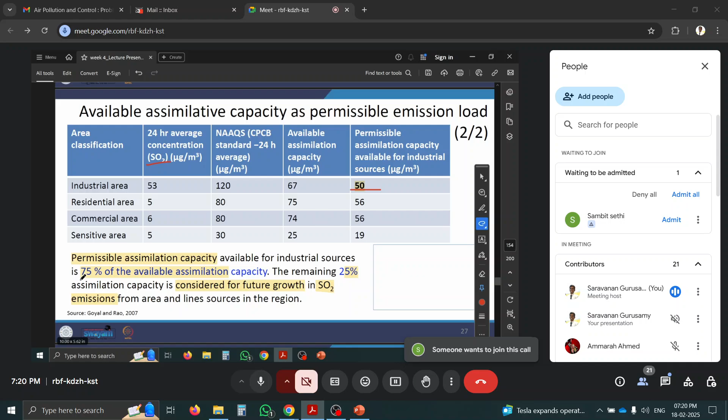There is a concept for SO2. The permissible limit is 50 only. So you have to have at least 25% as a backup. So only 75% available assimilation you can use. Above that you should not use.

They have a value of 50 microgram per meter cube already as emission rate. So they have calculated and given a conclusion that the industry should not come. This was the model.

Okay, so final concept is emission inventory. Inventory is the point of data collection and modeling. So whatever air quality we can monitor, we have to do emission inventory. Then we have to model, and that will give policymakers an idea to make control strategies. It's like a comprehensive stock of all pollution-emitting sources we have to identify. That is called the emission inventory, the data collection.

There is quantification, impact assessment, development of policy, and implementation of emission projection, emission monitoring. I am projecting before the industry comes, like an environmental impact assessment. I have to know what concentration it's going to emit. Then I have to project the emission model, and with that model I can say it's okay or not. That's the role of emission inventories.

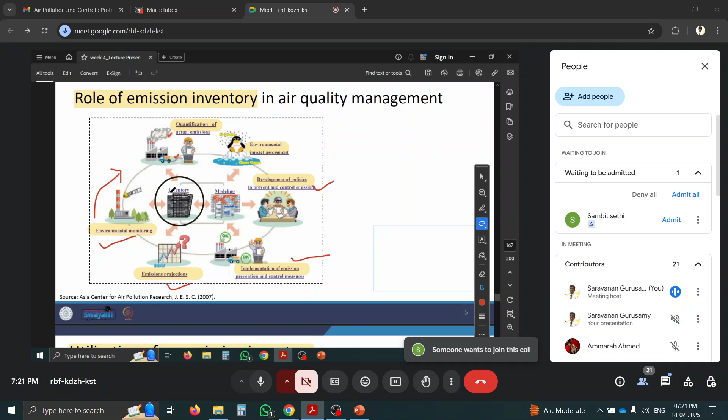Then with emission inventory, I can quantitatively analyze the emission, plan the policy, develop pollution control strategies with reduction measures, do air quality modeling, and make future projections.

You got it? Okay, this six points I am going to discuss. Quantity understanding is for promoting better understanding—I need to know the emission inventories, raising awareness of major emissions. Earlier it was mentioned that only vehicles cause all the pollution, but after doing emission inventory, I could know the actual source causing the pollutant. Only NO2 is emitted more from vehicles, but carbon dioxide and sulfur dioxide are emitted more from industries, carbon dioxide also from flights, and particulate matter is emitted more from volcano emissions. So source identification can be done only with emission inventories, and priority can be given for emission reduction. This is the overall concept.

Then for modeling activity, I need input data for all the models. For that I need the U value, meteorological data, and the base background air quality. For that, we need to do emission inventories.

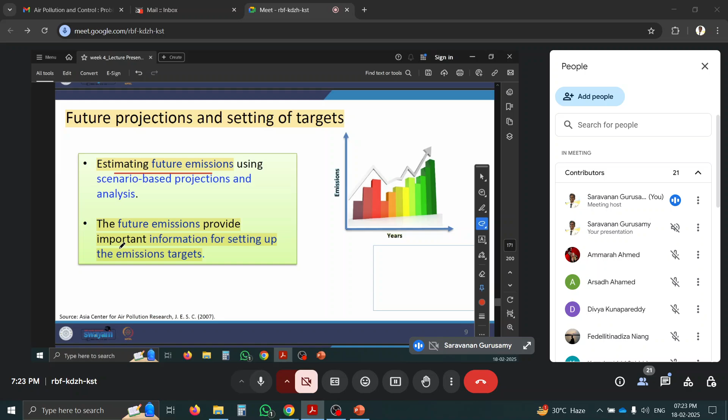Then for future projections, I need to estimate future emissions. For that I need the emission inventory, and possible reduction measures can be framed with cost-effective emission reduction measures. Like if I know the particulate matter is from only one industry through emission inventory data, then I can understand the cost-effective method to remove that particulate matter alone in that industry, instead of going with overall air pollution control measures.

And then plan policies—it will help policymakers develop measures to control and suggest solutions.

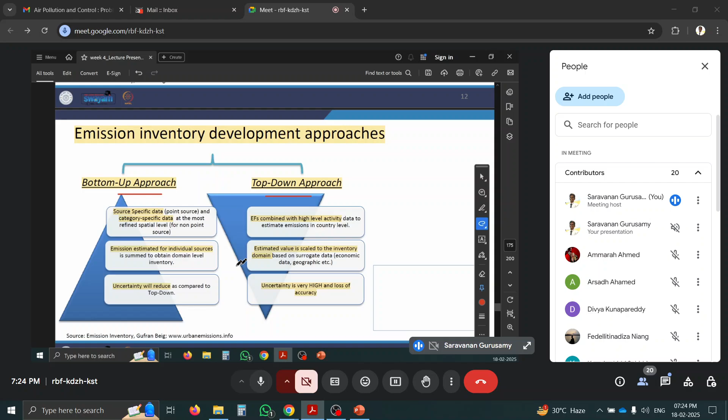What are the pollutants in emission inventory? Acidifying pollutant, toxic pollutant, persistent organics, greenhouse gases, and heavy metals. These are five common pollutants used in emission inventories: acidifying pollutant, toxic pollutant, persistent organics, greenhouse gases, and heavy metals.

How to find the emission? From the emission factor into activity data. How to find the emission factor and the activity data? Activity data refers to the emitters or sources like transporters, crematoriums, power plants, waste burning, biomedical waste, and diesel generators. These are all activities that are sources emitting air pollutants.

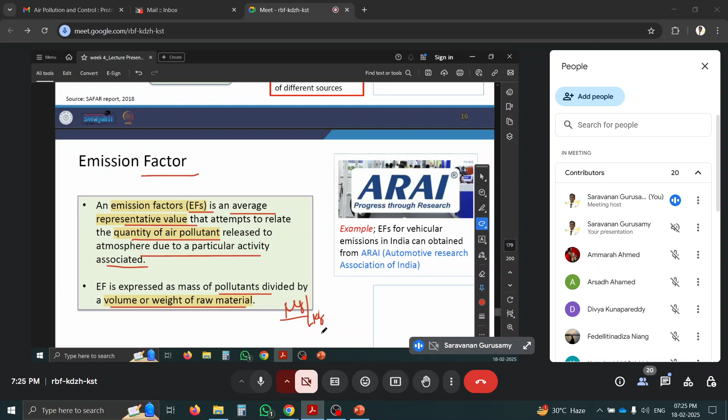Emission factor, EF, can be calculated. The definition is it's an average representative value that attempts to relate the quantity of air pollutant released to the atmosphere due to a particular activity associated with it. EF is expressed as mass of pollutant divided by volume or weight of raw material, so microgram per kg - mass of pollutant by weight or volume of raw material. That is your emission factor.

Emission inventories can be of four types: annual, seasonal, forecasted, and grid type - we already discussed that. The annual type can be useful for some areas like US greenhouse gas emissions. For climate models of global emissions, we can use annual average emissions.

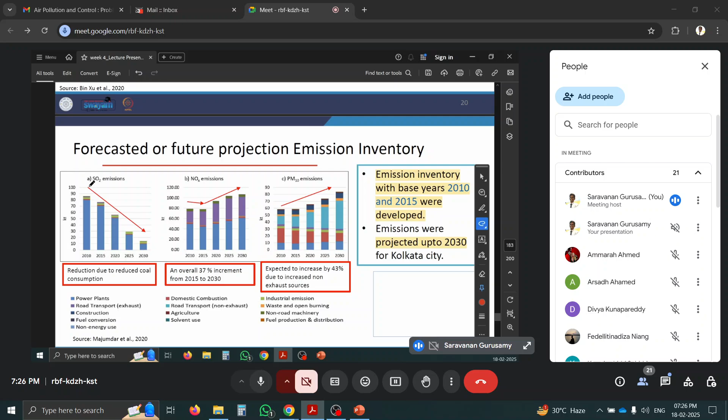Seasonal emission can be done for regional activities, like they calculated for China. They came up with results like secondary sulfate concentration from rice road dust and building cement materials, and projected which season is higher - more like forecasted and future projections. For modeling you can use this type of emission inventory.

Finally, grid emission, as mentioned earlier - you have to collect the data, do digital data generation, mapping and modeling, and finally you get the emission inventory. This is one type of emission inventory.

We have guidelines like the European Monitoring and Evaluation Program, the Intergovernmental Panel on Climate Change (IPCC), the UNDP program framed by the United Nations, and the Global Atmospheric Pollution Forum. They have given guidelines for emission inventories.

Each guideline talks about some combination of pollutants, and they are applied for different places. For long term, if you want to find long range transboundary air pollution across different areas and geographic locations with different aims, we can adopt different guidelines for emission inventories.

The major sectors, as mentioned, are sources like transport, agricultural burning, industries, and power generation - these are different sectors emitting pollutants. There is an emission inventory example for Delhi.

Emission inventory is a prerequisite requirement for chemical transport modeling and dispersion modeling. Extensive data is required, which is very important for doing the inventory. Grid emission inventory will substantially improve the spatial and temporal allocation of emissions.

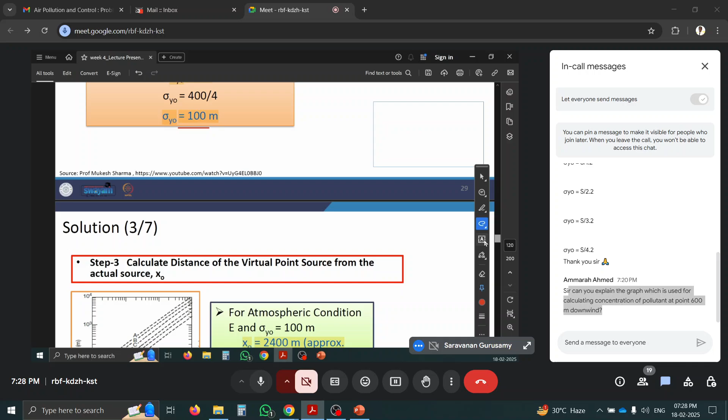Can you tell me the page you are referring to? Okay, here - any graph, I will take this one. So 600 meters downwind means x equals 600, right? That's what you're asking about. In the graph, I will go with x equal to 600. It shows 10 power minus 1, 10 power 0, 10 power 1, then 10, 100, 1000. Above that is where 600 would be. So go to 600, move up, and check the stability class A, B, C, D. If it's class D, then read off sigma Y and sigma Z. This is how we calculate sigma Y and sigma Z from the graph.

Yes, ma'am, you want to talk? Sorry sir, Ammarah Ahmed. Yes, ma'am.

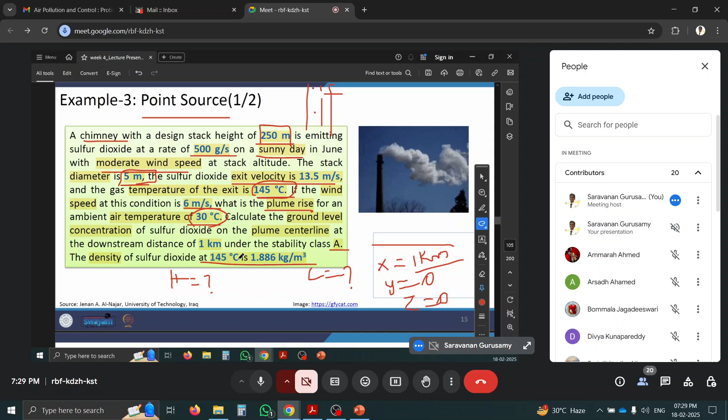I will go with the question you are asking about - 600 meter downwind. No, 800.

I couldn't hear you, ma'am. Sorry, sir. I couldn't hear you. Can you please text? No, okay one second, I will change my audio settings. It's in headphone only. Speaker also. Can you talk now? Sorry, now I got it.

So in these slides, in these examples which you have taken, it is solved for 500-meter downwind, and sigma Z value has been calculated. And if we have a 600-meter downwind, how will we find the sigma Z value in these graphs, the one I am showing here? So here you can see around this is kilometers. So 500 meter is 0.5 kilometer. Think about this as one, so 0.5 will come here. Got it? It's kilometer. Hope you got it now.

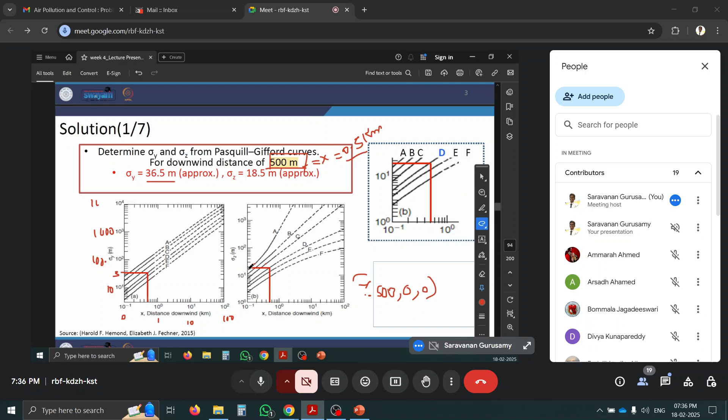Same if you come with sigma z, I am taking the same 0.5 and going with the d value. It is between 10 and 100, at the first point or between the first and second point. So they are taking 18.5.

Hope you understand now, ma'am. Yes, sir.

In the distance downwind, kilometer x, the first graph, the log graph - you said this 10 to the power of minus 1 is 0, right sir? 1 by 10 is 0.1. Sorry, not 0, I'm sorry. It's 0.1, 1 by 10. That is 10 to the power minus 1. 1 by 10 is 0.1.

So 0.1, the next numbers are 0.2, 0.3, 0.4, 0.5, like that. Point 2, point 3, point 4. We are having 500 meters, which is 0.5 kilometers, right?

So first is itself 0.1. This is itself 0.1. So this will be 0.2, 0.3, 0.4, 0.5. You take 0.5 vertically upwards, and then fine.

If it is 5 kilometers, where will you take? This is 1 kilometer, then 2, 3, 4, the fifth kilometer I have to take, and I have to take here. So they have taken 6,000 meters, right? 6,000 is 6 kilometers. In the next problem, I will go there. This is 0.8, somewhere we have taken around 6,800 and all.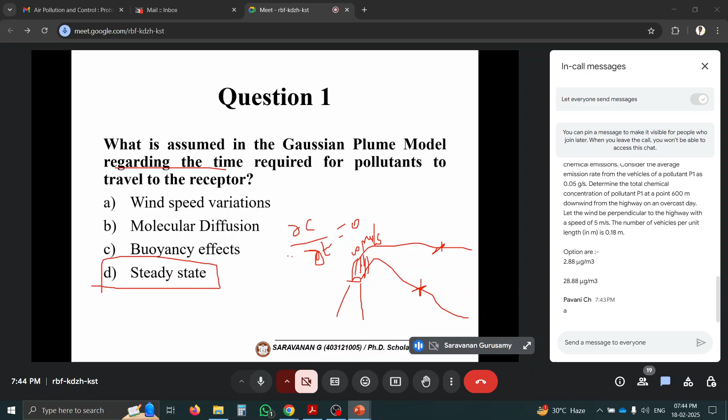We are assuming that if 10 milligrams per second is emitting every time, it's the same concentration—it's not varying. If you see here, it's around 100 microgram per meter cube, here it is 10 microgram per meter cube—that is the same every time. That is the steady state condition. So the answer D is correct, ma'am. That's the assumption here: the time required for the pollutant to travel to the receptor is neglected, so we are assuming this is a steady state condition.

Other assumptions—I got one question on this in the GATE exam, that's why I'm stressing here. It's due to molecular dispersion: no diffusion in the x direction, only dispersion due to the movement from wind direction. Y direction and Z direction dispersion is due to turbulence, that's why the concentration is reducing in the Y and Z direction—in the center line it is maximum. Other assumptions: uniform continuous emission rate, wind speed is constant, terrain is flat, and the shape of the plume is conical.

These are all assumptions—conical in the sense it follows a normal distribution, center line is maximum, sides it will be minimum, and no deposition, no reaction—this is one of the limitations. Second question: what is an advantage of the Gaussian plume model regarding its response time? Options are slow response time, immediate response time, time consuming calculation, dependence on supercomputers. They're asking about the advantages of the Gaussian Plume Model, GPM.

Is it a slow response model, immediate response model, time consuming calculation, dependence on supercomputer? Since it's a simple equation, the concentration at x, y, z is calculated using the quantity Q, pi, sigma y, sigma z, u the wind velocity, with exponential terms involving H and sigma y, sigma z components, plus a factor of 1 by 2. All parameters are known, so you just put it into Excel or do a simple mathematical calculation. So it's an immediate response model, quicker than a numerical model, extremely fast and simple in its mathematics. That's the advantage of the Gaussian plume model.

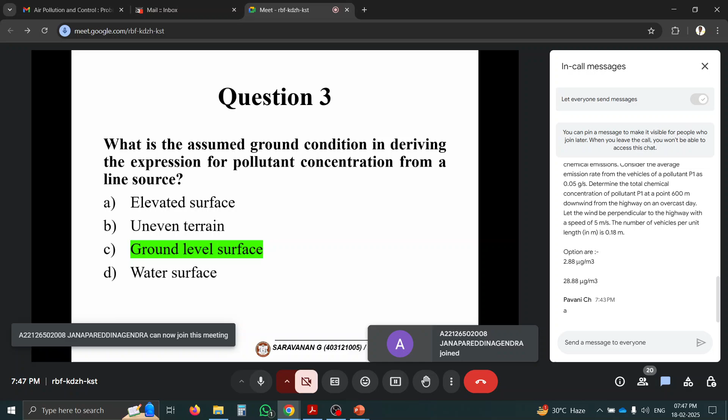What is the assumed ground condition in deriving the expression for pollutant concentration from a line source? Earlier we were talking about the point source, but for a line source, the ground level should be the surface, because H will be 0 always for a traffic emission, since the pollutant is emitted at ground level surface. So the expression for pollutant concentration from a line source has ground condition H equal to 0. The assumption for the line source model is ground level surface emission, and the line emission is in one direction while the wind is in the perpendicular direction - this is y, this is x. But for a point source like a chimney, the x direction, the centerline y, and z are all in the same axis. For the line source, the wind is perpendicular because it blows along one axis while the emission extends from minus infinity to plus infinity along the line.

Do you want to solve that problem? We will do that at the end. So in what direction is the wind assumed to be blowing relative to the line source? As already discussed, it is perpendicular to the line. Now, the equation given below is valid.

Please answer this question. The equation given is valid for calculating the volumetric flow rate, used to find the volumetric flow rate Vs for unstable or neutral conditions. All parameters are given, but the volumetric flow rate must be greater than what value to find the buoyancy F? If you get F, you can get delta H, the plume rise, and H equals the physical stack height plus plume rise gives the effective stack height. The answer is 50 meter cube per second - Vs should be greater than 50 meter cube per second for this formula to be valid. So the determination of effective stack height using the delta H formula is valid only when the volumetric flow rate is greater than 50 meter cube per second.

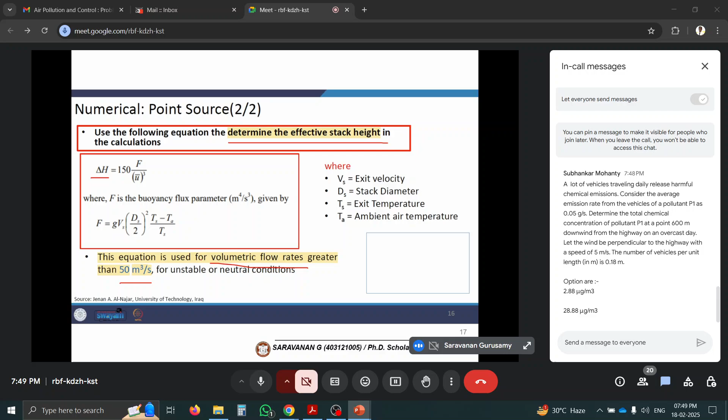What is the potential consequence of low ventilation coefficient? We have talked about ventilation coefficient and air dilution. If the ventilation coefficient is high, there is good dispersion. If the ventilation coefficient is low, there is poor dispersion, stagnation, and poor air quality. So option B is correct - stagnation and poor air quality. The higher the coefficient, the more efficiently pollutants disperse; if ventilation is lower, there is poor disposal and stagnation.

Next question: the height of the layer in which air pollutants or any constituent emitted or entrained undergo vertical dispersal due to turbulence and convection is called what? It's the height of the layer up to which mixing happens - above that, it's not happening, pollutants are only trapped in this layer. This is called the mixing height. Up to that height there is an unstable condition, which is why mixing happens. Above that, there is an inversion condition, and the pollutant cannot escape - it will be trapped in the unstable layer below. So the mixing height is the height of the layer in which emitted pollutants are vertically dispersed; above it lies an inversion condition.

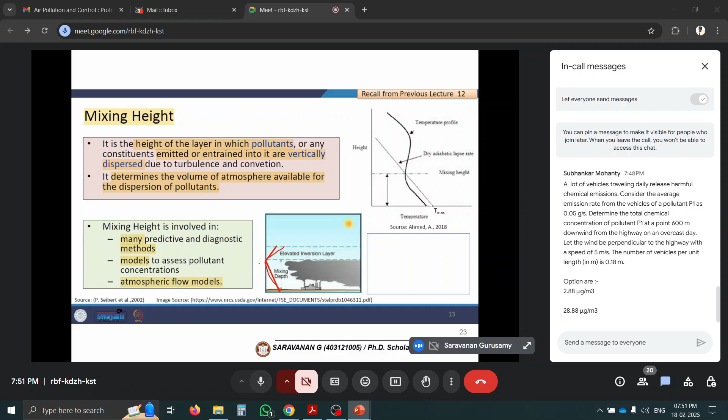Available assimilation rate - we are talking about air assimilation, right? So air can purify on its own. Up to which level, how can we calculate the available assimilation?

We already have a background concentration and a standard. If you subtract these two, you get how much pollutant you can still emit. That's the available assimilation capacity, AAC. It can be calculated using the NAAQS standard, National Ambient Air Quality Standard. Minus, if you're taking for CO2, my standard is 100 gram per meter cube, just as an example.

So my ambient pollutant concentration is already 50 gram per meter cube. So 75% I can allow, and 25% I have to keep as a cap for the future. 75% means 75 gram per meter cube I can allow - that is the total assimilation capacity. 50 is already there, so I can allow the industry or a SIPCOT to emit up to 25 gram per meter cube. Above that, there should not be any emission, otherwise the assimilation capacity will be lost. That's all that's available - that's the importance of finding available assimilation capacity, AAC.

NAAQS standard minus ambient pollutant concentration - so the answer is A. Yes, this is the available assimilation capacity. It's determined by the difference between the permissible and the existing pollution concentration.

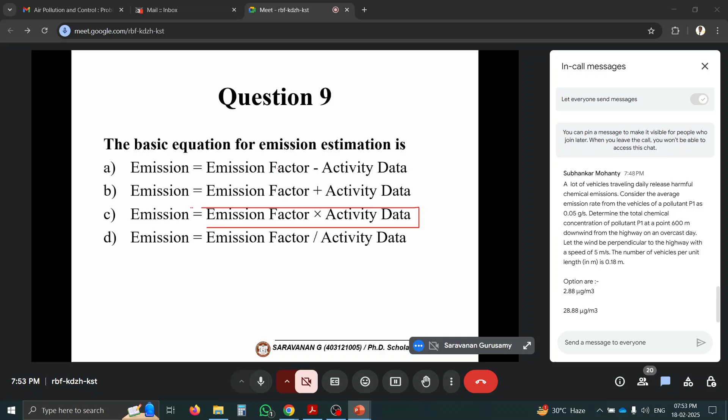What is the basic equation for emission estimation? Emission equals emission factor into activity data, right? Emission factor can be calculated based on the sources and the activity. Emission factor can be calculated with three models.

What does the emission factor represent in the context of air pollutants? What are they asking - random emission data, mass of pollutant released per unit volume of raw material, dispersion coefficient, gridded emission inventory? What is the emission factor definition they are asking? It's mass of pollutant per volume - milligram per meter cube or milligram per ton of air, as I told you.

Emission factor is expressed as a mass of pollutant divided by volume or weight of a raw material.

One more last question. What is not a limitation of the Gaussian plume model? Options: it does not account for the time required for pollutant to travel, it's not able to calculate the recirculation effect caused by obstructions like buildings, it's unable to predict concentration beyond a radius of 100 km, it's not well suited for regional modeling of particulates mostly due to simplified treatment of secondary aerosol formation. Can you answer this? All are limitations, but which one is wrong?

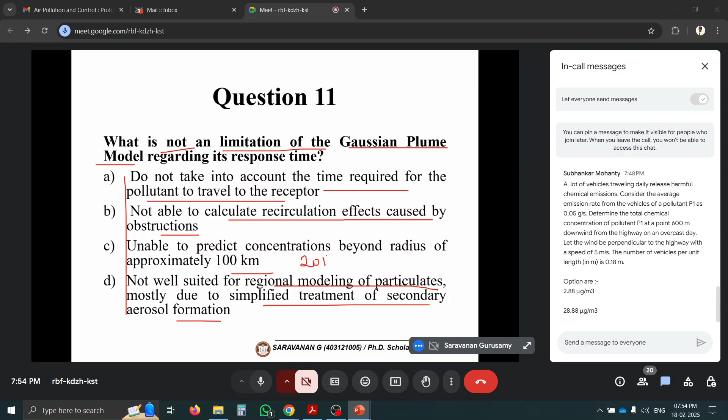Which is wrong? It's unable to predict the concentration beyond a radius of 20 km, not 100 km. Beyond about 20 km, we cannot use the Gaussian plume model. That's what's given - unable to predict concentration beyond a radius of approximately 20 km. That's one of the limitations.

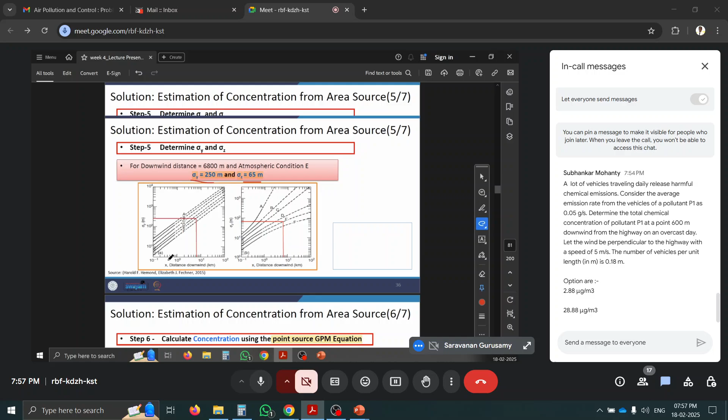For the line source, I'm asking. I'll go with the line source formula. Area source, area source, area source. Okay.

So what's for the line source? Yeah, this is the answer, right? C equal to C of x comma y comma z equal to 2 small q divided by root of 2 pi sigma z into u into e power, exponential of minus h square divided by 2 sigma z square. What I told, h is 0. So if it becomes 0, e power 0 will be 1, so this term gets cancelled. So only you need q, u, sigma z.

So 2 into 0.009 we know, 0.009, and divide by 2 pi we know. U is known, 5 meter per second. How to calculate sigma z? That's what you have asked, right? So it is 600 meters, so 0.6 kilometer at the stability class of D. What is the sigma z value? Can anyone tell, please?

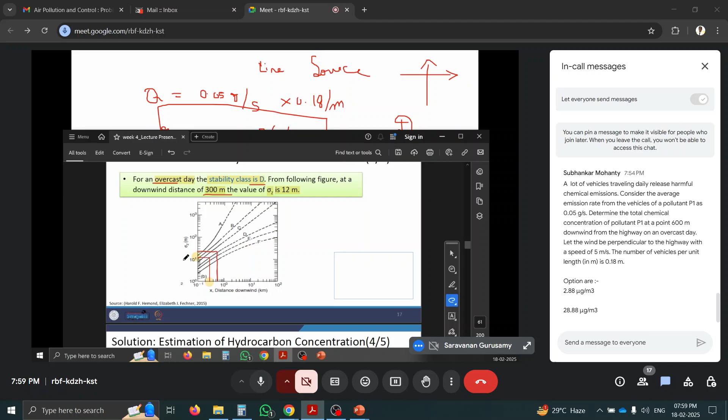Can I go to the PowerPoint again? Okay, I'll move. I'll check for sigma z for 0.5, so 1, 0.1, 0.2, 0.3, 0.4, 0.5. Stability class of what they given? D, right? Stability class of D. So this is matching here, so 10 power 1 to 10, 20. So I am taking value of 20.

Sigma z is 20. What is the unit for sigma y and sigma z? It's meter. So if you take out everything, it will come in... what is the q in gram? So gram per meter cube it will come, because this is meter, this is meter per second. Everything will cancel out, and this is meter, so everything will be in gram per meter cube.

So what's the answer here? So convert into 10 power minus 3, you can take as microgram. 2 into 0.009 divided by 20 divided by 5 divided by root 2. Root 2 is... okay, value is 0.00018.

0.00018 divided by root of 2 pi. What is root of 2 pi? 2 into pi, then square root of that value will be 2.51. So what is the answer? 0.00018 divided by 2.51. So if it is converted as 10 power minus 6, that is 0.7. This is coming 0.7 microgram per meter cube is the answer.

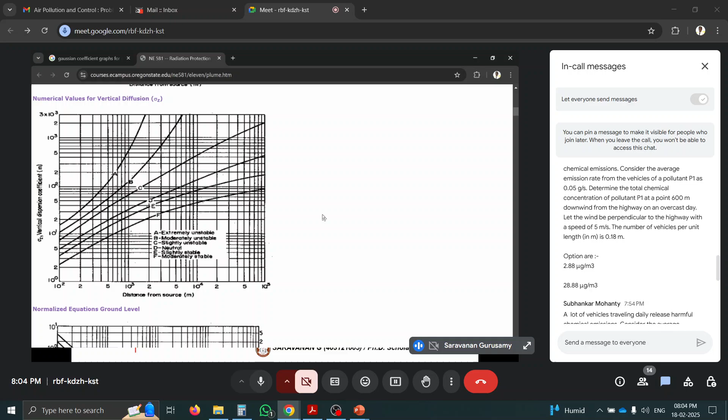What is sigma Y value? What is sigma Z? Okay, for class D, it's around 20, 21, 22 only it's coming. So it's correct, 20 is correct. So sigma Z is approximately 20, which is correct.

So U is 5. They directly gave it, right? 5 meter per second is the speed at ground level, so no need to convert anything. 5 meter per second is correct. Root 2 pi is correct. Then I will check the formula.

Which becomes 0, this will be 0. Root of 2 pi, then there is a calculation mistake. I will calculate once, 1 second, you wait, I will take my calculator. Root of 2 into root of pi.

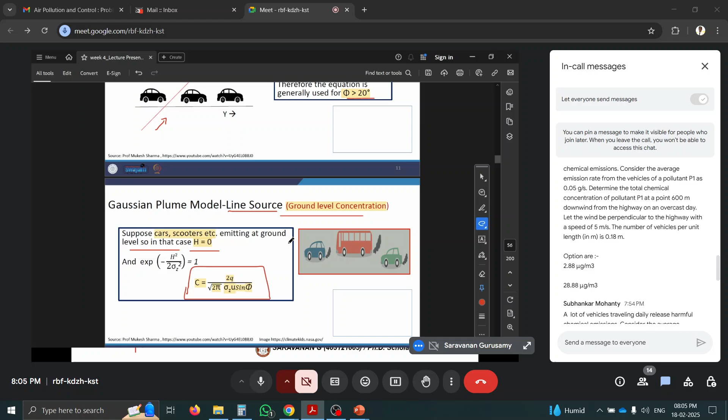So H is 0. Yeah, H is 0. Yes. If it's a ground level concentration, you have to use this equation. This is correct: 2Q by root of 2 pi. This alone you have to keep. Sigma z U root of 2 pi, 2Q.

Okay, here is the mistake. You have to divide. No, no, no, that's already correct only. Vehicle per meter is 0.18 vehicle per meter, into emission is 0.05 gram per second. There I multiply 0.18 into 0.05. This is also correct, then there will be an option mistake.

I will write to the NPTEL team. H is 0, yeah, H is 0, because there is no height, right? It's a vehicle, vehicle is emitting at the ground level, so it's not above ground. How much above ground is your... sorry, H is the effective stack height. There is no effective stack, right? Only the vehicle is emitting at the ground level.

So the answer is coming as 7 only. So the answer is coming as 7, into 10 power minus, what is that? 0.00018 divided by 2.51 is correct, so it's 10 power minus 5. So if you take it, it's 71. Yes sir, that's what the problem was, because after calculating also we are not getting the...